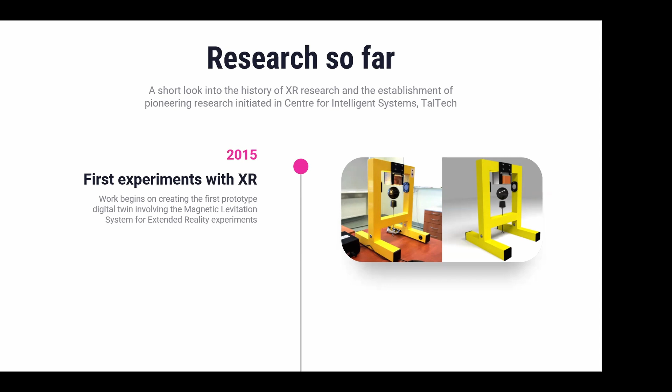Of course, it also makes sense to go back into history a little bit and show the complete development from where it started and to put the current contribution into context. So it all started with digital twins and extended reality in 2015 for us. At that point, the first experiment with the so-called magnetic levitation system was created. It was a kind of first case for us that we recreated an object as a digital twin, including a mathematical model, which was fairly accurate, and also its virtual, or let's say digital representation, with which users could also interact. And I will show what this means in a few moments. This was our first contribution there.

3 years later, we have actually arrived at a full XR control laboratory. Now, this was done together with our partners from a company which nowadays is called Varcus Solutions. It used to be Limestone Games, but point is that we were able to join forces and create this full solution for a virtual reality lab. And let's have a quick look at how that looked like.

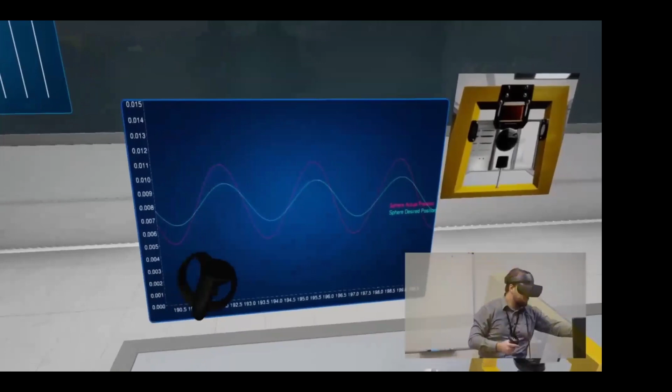So here the idea is that apart from just having access to this virtual plant, let's call it that, with which you can also interact in a meaningful way, just as you would with the real device, we can also, because this is a virtual reality environment, augment it with different additional things like the time series plot you can see on the left here.

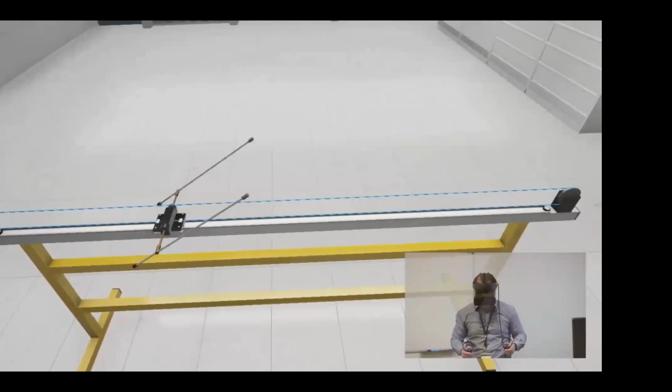So the idea is that we can add many such interactive elements, and because this is a virtual reality environment, there's nothing stopping us from delivering to the user an experience that cannot otherwise be achieved with, let's say, a flat screen approach, because everything can be interacted with, whatever it makes sense to interact with, and you can actually still feel the effective presence of all of these objects when you are in the virtual environment.

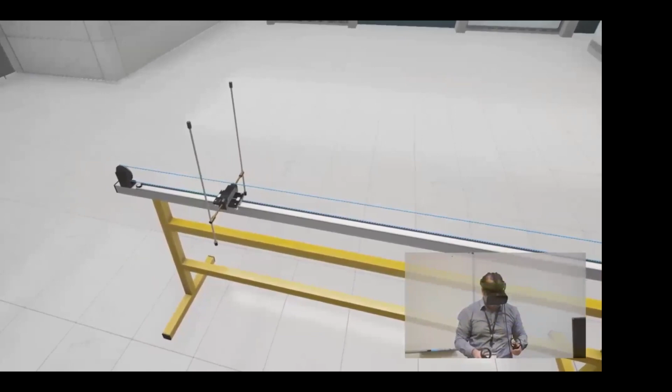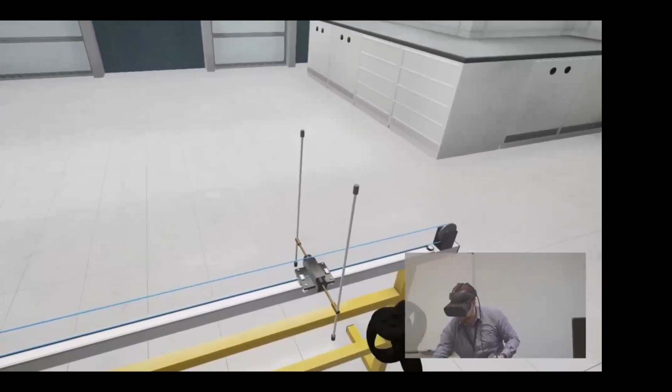Looking right now at a flat screen, it doesn't seem like much, but when you're there, you understand the feeling. So you actually feel like that object is there, and if you know the real life counterpart, it looks and behaves exactly like that. Which means that we successfully achieved one of the key aspects: we were actually able to augment the user's experience or to scale up, because we now had a full lab that could be used without actually interacting with the real devices.

Moving on, in 2020, an interesting development also took place. At that point in time, my bachelor student Stanislav was working in the lab with a different object, the one you haven't seen before, which is a multi-tank system, another lab scale object that is a replica of some real-life system, which can be found, for instance, in a water treatment facility or chemical processing.

So basically, the idea there was we wanted to introduce tuning controllers into the complete experiment with some novelties. And this is, by the way, the main discussion point for today. But eventually, his work was also turned into a research publication, which netted him first prize at a state competition for research work, which was a major milestone for us.

Then, based on this success, we moved forward with Reimagine Lab. Again, it was mostly a doctoral thesis that made it possible. And in 2020, the publication actually was released and the framework was developed. Then, late 2022, the HoloLens 2 experiment was created, which is actually quite fascinating, again taking the initial idea from Stanislav's work and bringing it to a completely different level,

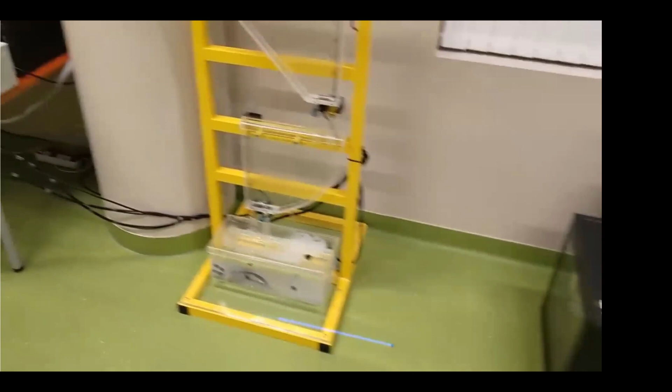So this is the experiment that was also successfully introduced into the curriculum, into the course of intelligent control systems, and this is the experiment that the students are asked to perform. Essentially, what you first do is you put the digital twin into the real world. In this case, digital twin means a visualization, which you can also interact with, along with some additional components. Now, obviously, it doesn't really exist in the world. It's a hologram. So here, once it appears, you can interact with it.

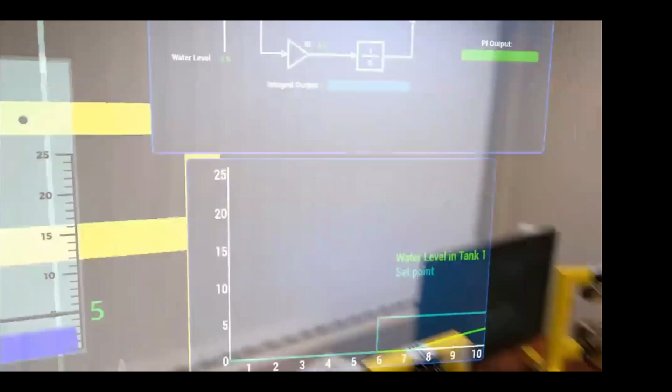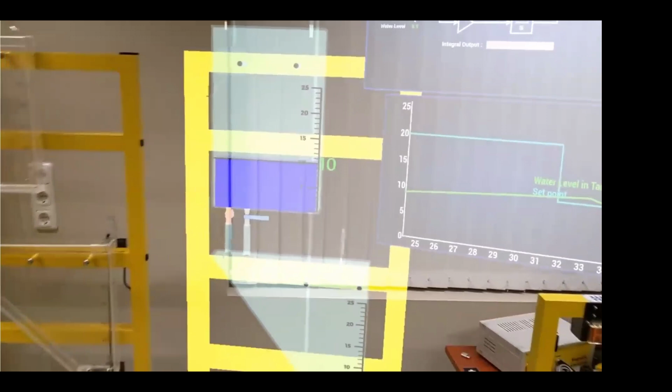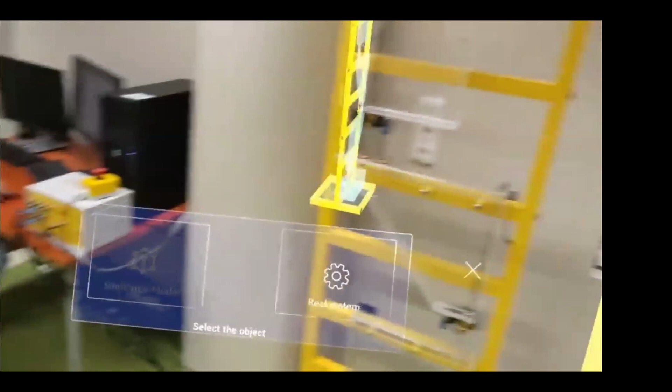The idea is that it's connected to a simulation, but you still get to tune the controller, which in this case is a PI controller. So the idea here is that you have spheres, which you can resize, and the scale of these spheres will determine the coefficients or the gains of the PI controller. And so the idea was that for students, it might be easier to relate the scale idea to the actual gains and to the effects that they can monitor on the digital twin with the time series plot, which is shown in real time, and then to design a controller that will fulfill time domain specifications.

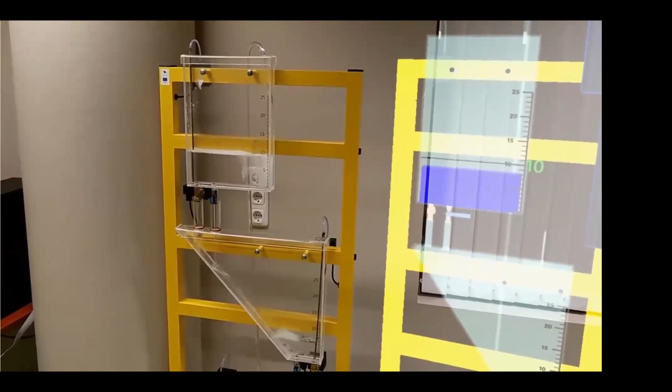Now, once that is done and the controller is achieved, you can see that now we have switched to real life mode with the actual plant. And that is the major thing here. So first, as a control engineer, it might be a university student or maybe even a control engineer from a company, you get to tune a controller on the simulation.

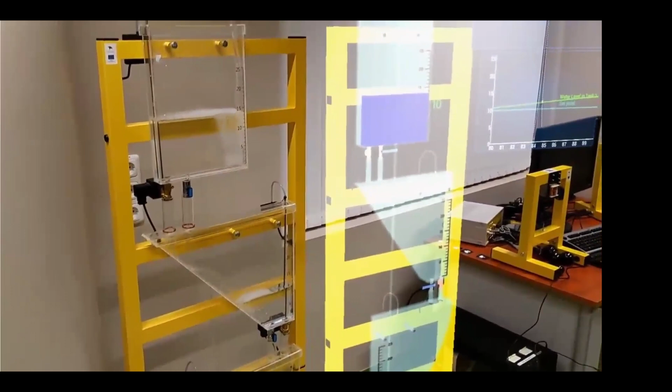If the simulation is fairly frequently updated with the real system, it should be coherent simulation, which means that the controller you tune for it will also be applicable to the real system, which you can then easily transfer to the real thing. That's the main idea here.

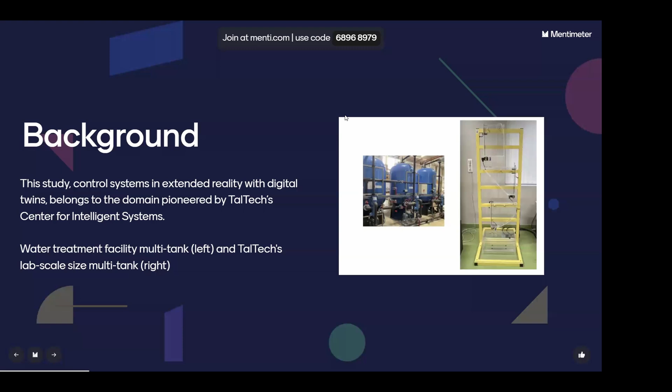Our problem statement was that there's a significant potential for XR technologies to enhance industrial operations through improved human-machine interactions, but existing XR-driven interaction methods with digital twin frameworks lack empirical validation. So, as you can tell, without validation, the optimization of user interfaces for ease of use and technical precision remains fairly uncertain, hindering the effectiveness of XR application in industrial settings.

We had three objectives in mind: to evaluate XR interaction methods for the multi-tank control system, to assess cognitive load using the NASA TLX and user experience using the SUS questionnaire, and to provide insight for future XR interface design for control systems.

Our methodology consisted of three parts. We conducted a systematic literature review, then we developed and implemented the interaction methods that we wanted to test, and then we performed performance, usability, and workload testing on these interaction methods for control systems. The tools that we used to achieve this were a Microsoft HoloLens 2 headset, Unreal Engine 5, and Microsoft Mixed Reality Toolkit. And also the pre-made system usability scale, or SUS, and the NASA task load index, NASA TLX.